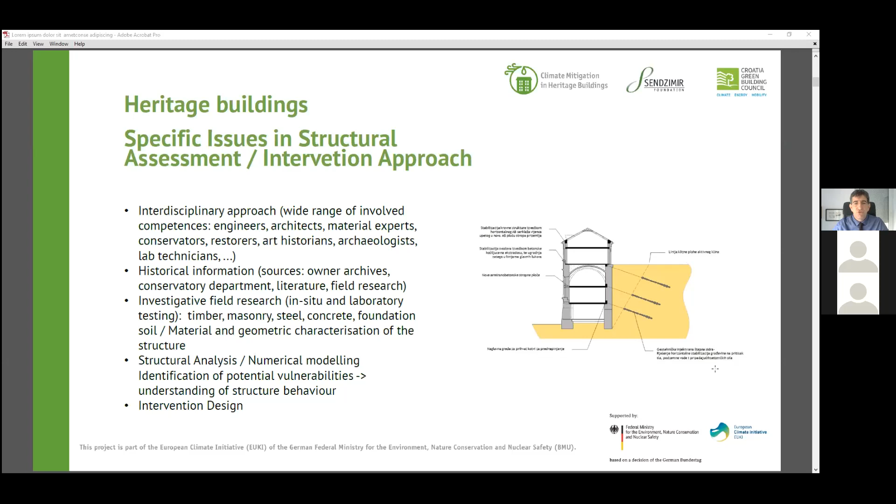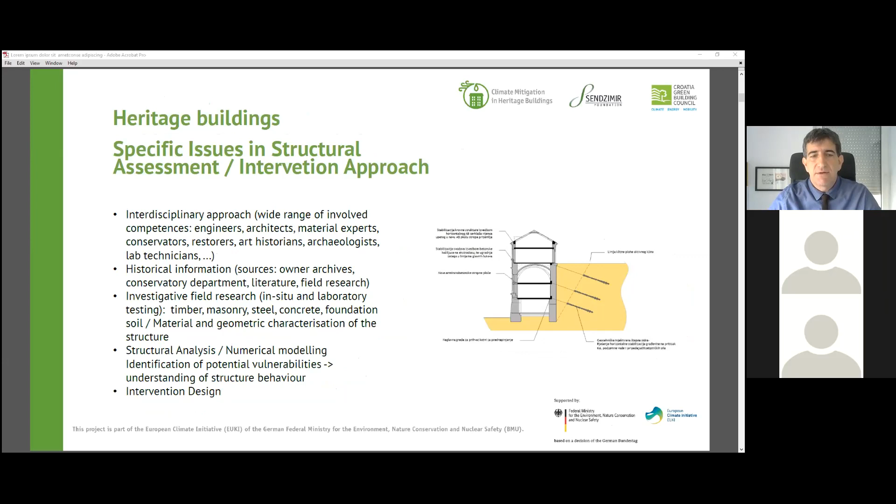Apart from this historical research, we have to do investigative field research of the materials in order to understand the structure, to see the damages, to see cracks, to see what is going on. And then we do structural analysis, some numerical modeling, to confirm our presumptions. So identification of potential vulnerabilities in order to understand the structure behavior. And then the last step is intervention design.

Therefore, I wanted to emphasize this. When it comes to heritage building structural interventions, a thorough assessment is everything. The retrofitting measures just follow. So again, this is very important for each structural engineer.

Today we have a huge variety of different computer programs which help us, but we shouldn't forget the field research. We shouldn't forget the investigative part. We shouldn't forget in situ testing, and all of these activities help us to understand the structure. And then, as stated here, the measures just follow.

So let us begin with this 19th century public building. The majority of presented buildings are in the Zagreb area. Some of them have been seriously damaged by the two earthquakes we had, and some of them were repaired before. This building consists of two parts. I hope you can see my pen. Okay, so this is the first part, and this is the second part of the building.

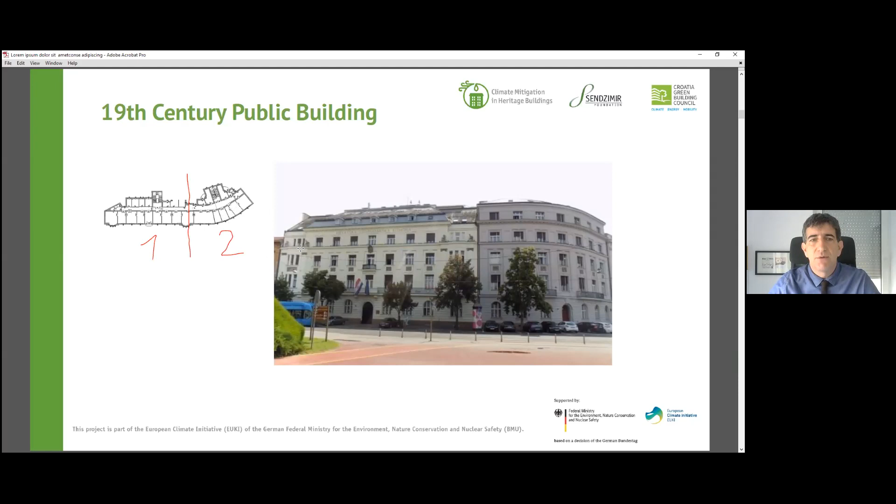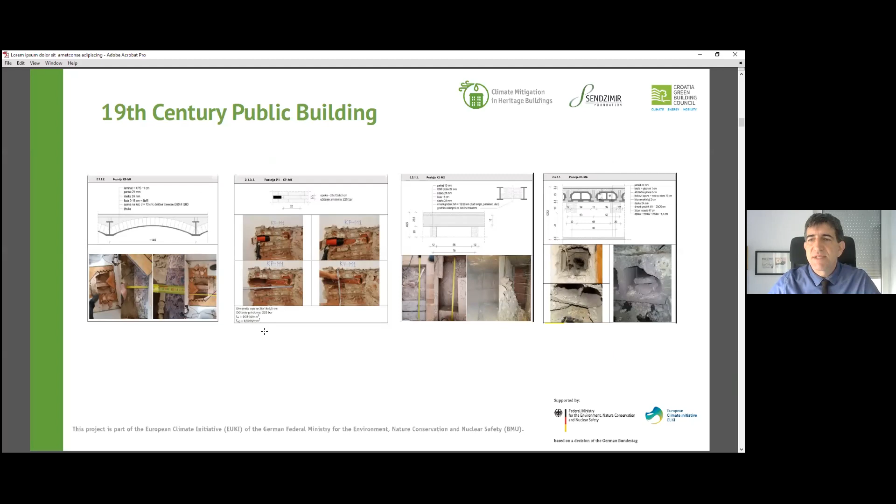The owner is the same, but we have to analyze it separately because in the joint here we have two separate walls. First, as I already said, the investigative part: these are some characteristic drills, sondages and testings in order to find out what is inside the walls, what is inside the floors. And this helps us to understand the structure and the behavior, so we can plan.

This is the characteristic floor plan. As you can see, again, I'm going to discuss only structural matters, but I hope it will be interesting for the other listeners, also architects or other listeners.

So the plan shows us the weakness of this building, and this is the lack of walls in transversal direction. So this is the direction which does not have enough seismic walls. All walls here you can see are only partition walls and do not work in the seismic loading. The longitudinal direction is good because we have 3 very strong lines of walls.

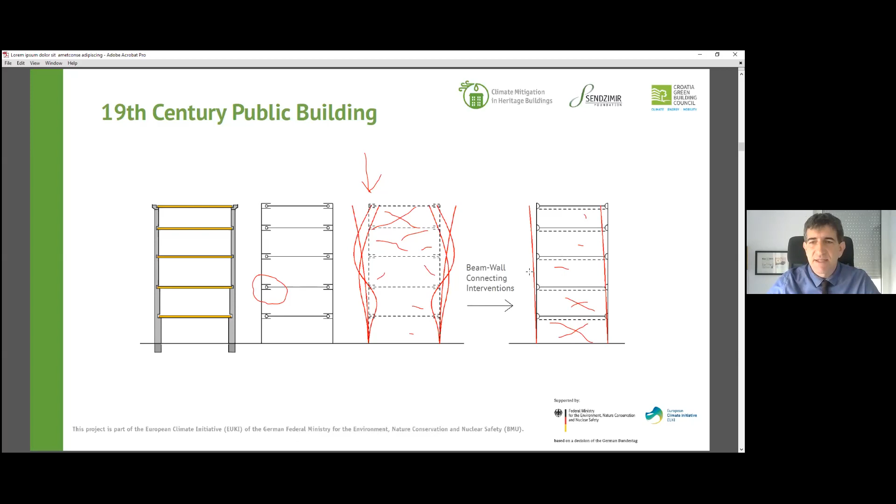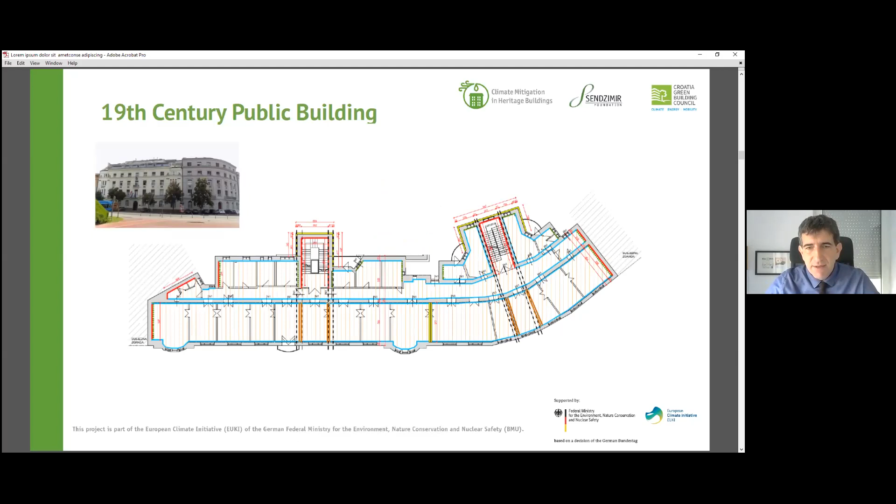So these are the measures we planned to do. These black lines present pre-stressed steel ropes, in order to attach the front of the house to the new strengthened cores in the back. So these are the pre-stressed steel tendons, and the blue lines present steel elements like angle profiles in order to achieve floor diaphragms, to stiffen the floor in its own plane.

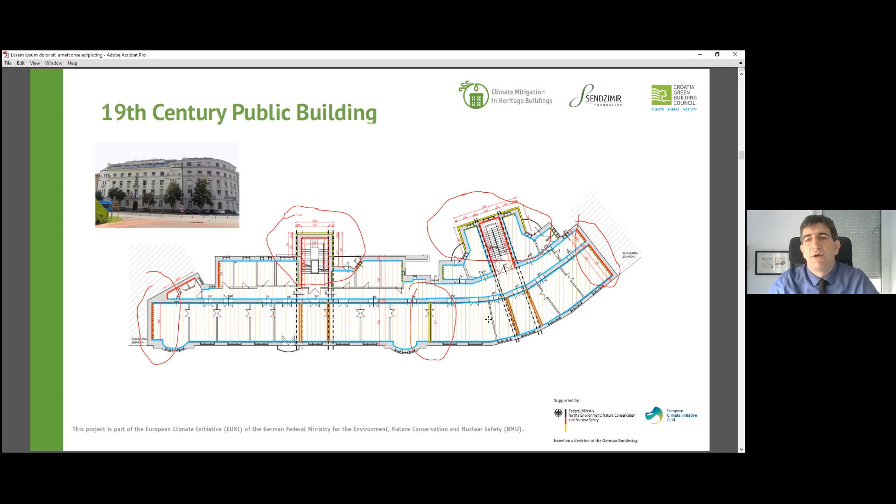The yellow lines are reinforced concrete, as I said, in the back, and also here at the joints, and here. So we have this symmetrical new disposition of elements, and therefore the building is much stronger.

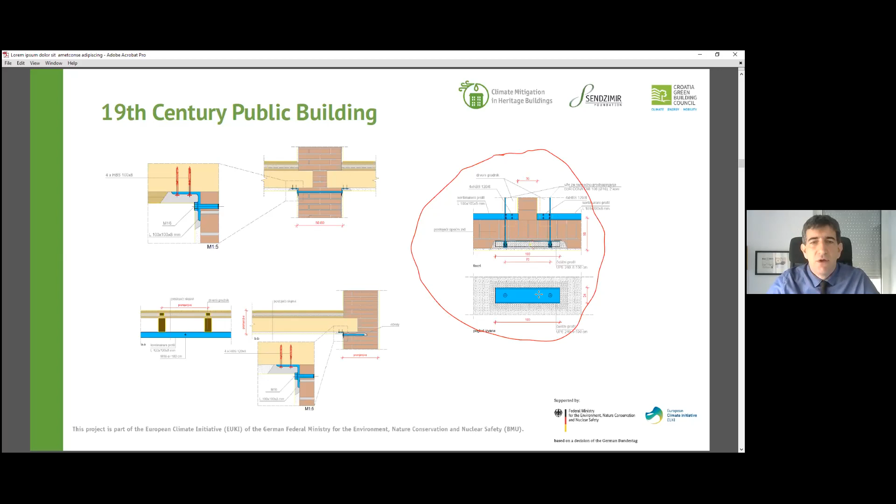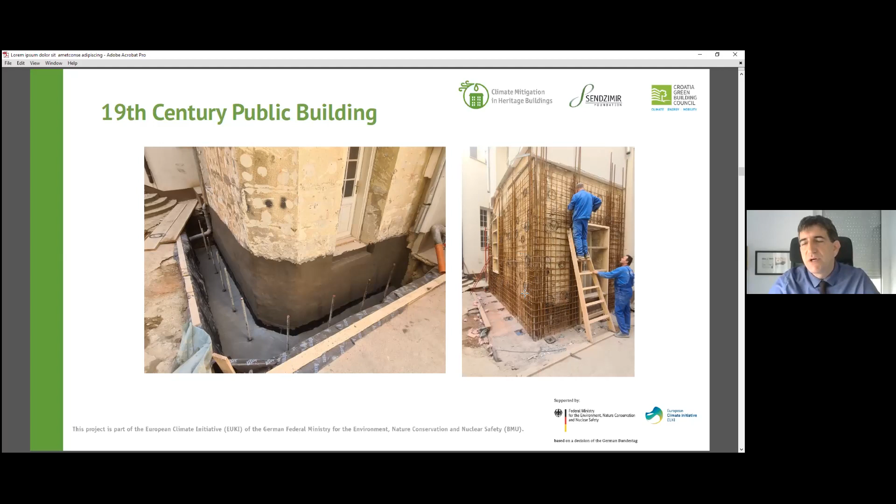Here are some photos from the construction site. These vertical steel rods are geotechnical anchors, 12 meters deep, in order to have tension forces at the bottom of the new core. And these are rebars for a new wall.

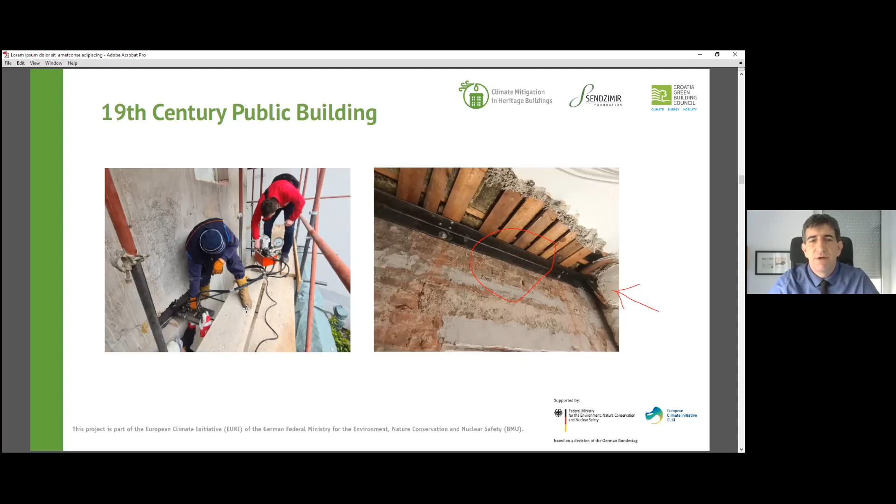Also here you can see this steel angle, which is under the ceiling, and this here is a partition wall, and the very important thing is for this steel angle to have continuity. So we had to break this partition wall in some small area just to have continuity of this steel angle. These two guys are pre-stressing steel ropes from the outside, and we achieved approximately 2.5 to 3 tons per steel rope.

Okay, the second object is the very famous Viewpoint tower in Zagreb, Park Maksimir. This is a masonry structure, early 20th century. We have original archive drawings.

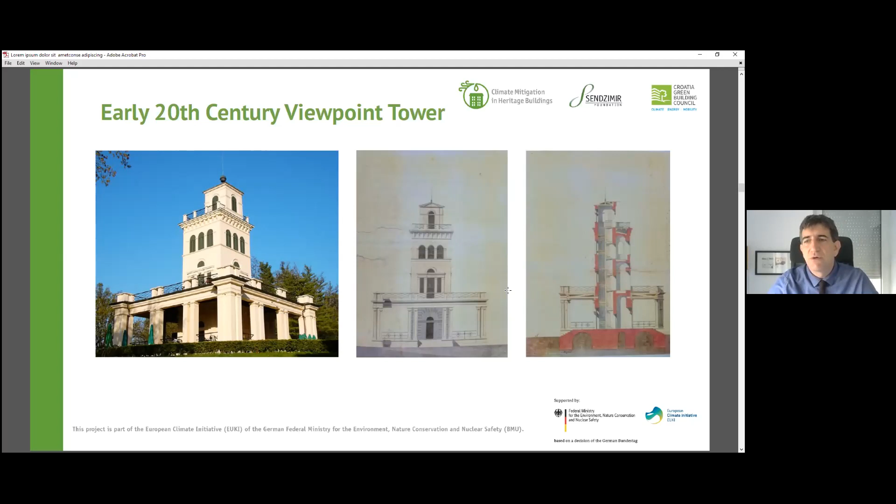As you can see, this is all bricks without concrete or without steel. Therefore, during this earthquake, it had a huge number of damages and cracks in this area here. So in this section here, the building is the weakest because it doesn't have enough walls to transfer the horizontal force.

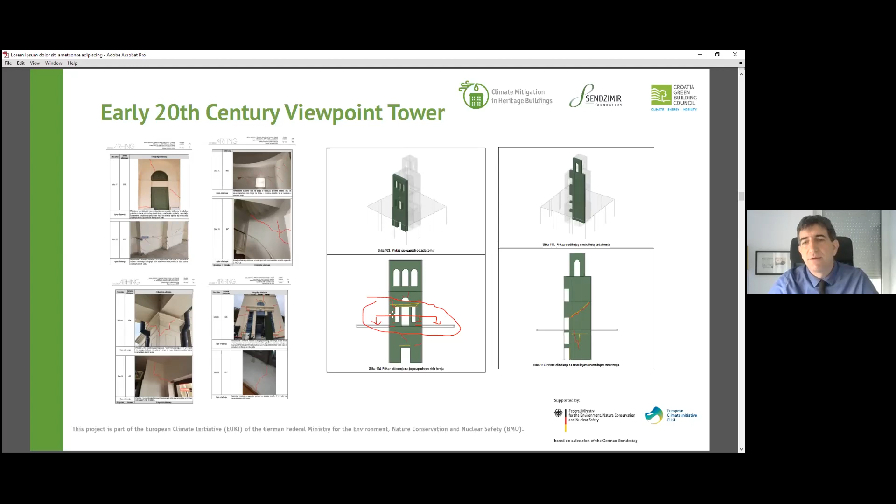Therefore, since we have this cape around it, we also have the stiffness issue here. So this is the basic damage mechanism we figured out. When we look at the majority of cracks, this is the most vulnerable area, and therefore with the measures we want to strengthen this part.

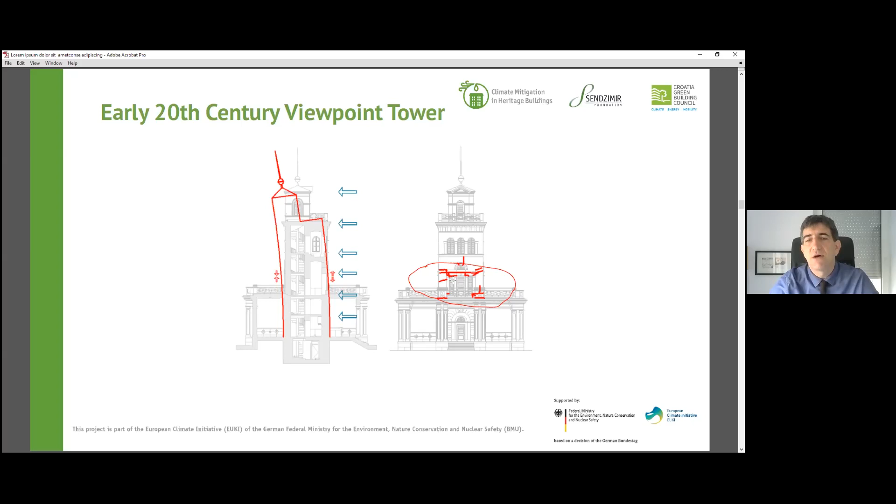Again, all the measures are going to be inside and not outside, so as not to ruin the appearance. So this is the steel, like a steel cage from the inside, which is modeled as a Vierendeel girder. It's like a truss, but without diagonals. Here we have chords. This angle profile is a chord, and these are horizontal elements. Again, we have steel ropes from the inside for the pre-stressing, and this is the anchorage detail from the outside. It will be covered in plaster afterwards.

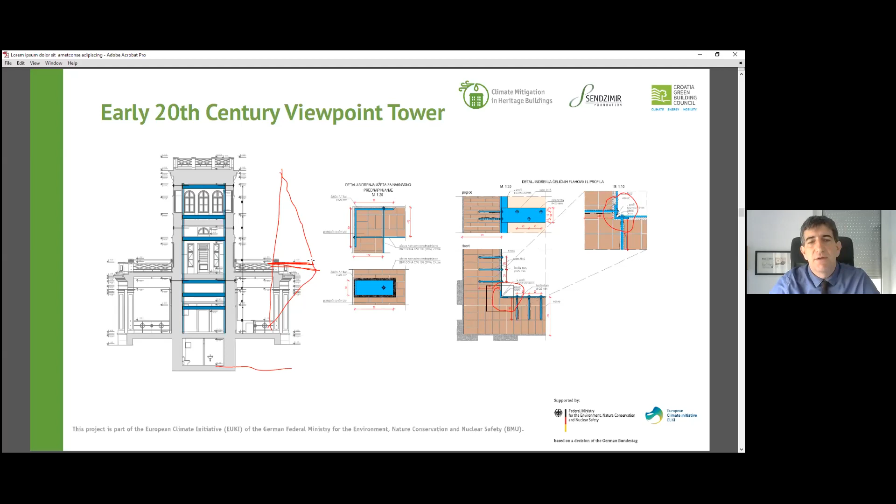So as you can see, we did not anchor this system to the foundation level. We just put it at the terrain level, because of the horizontal force and the moment it creates with this tower, this cantilever. So this is the section with the maximal horizontal forces. Okay, let's move on to the next.

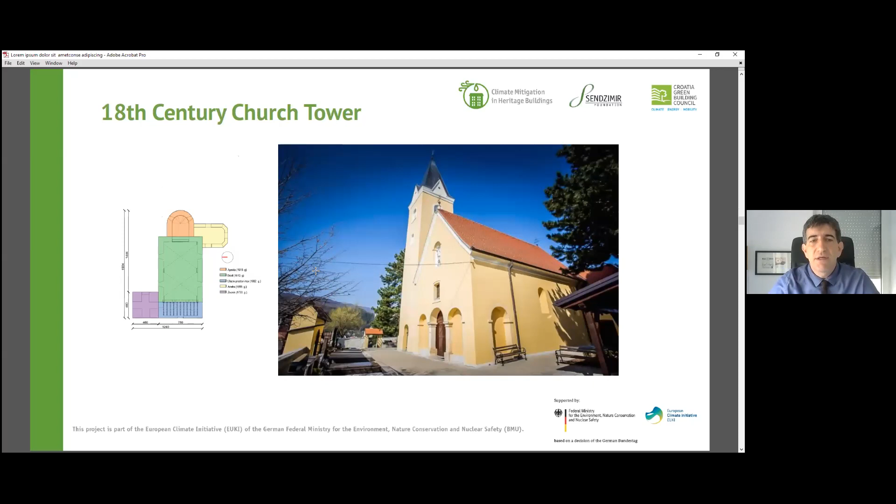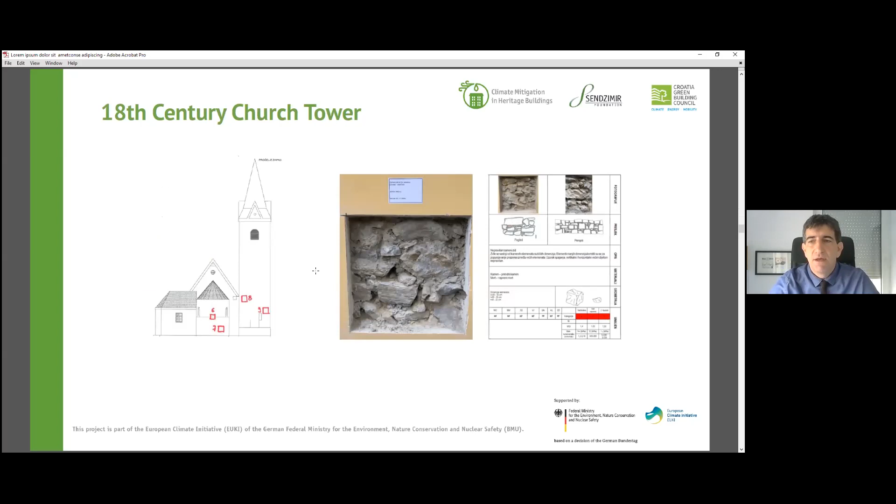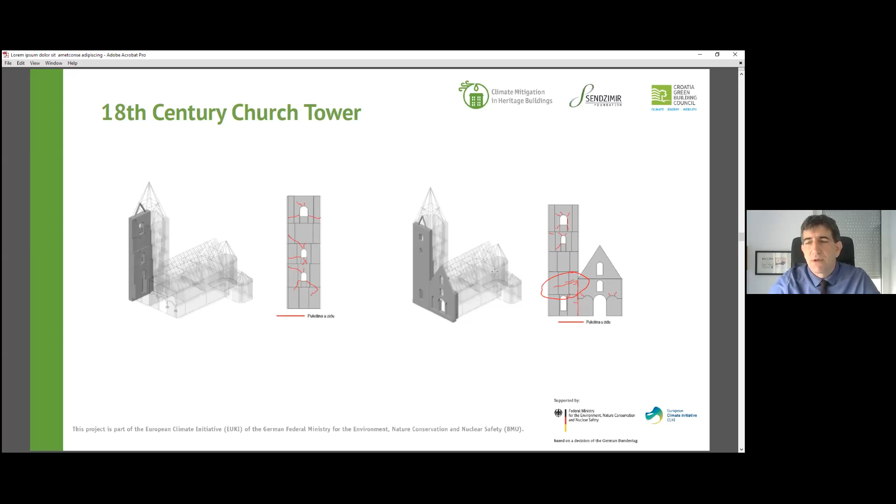It's a church tower, 18th century. This is a stone masonry building. These are investigative openings. These are the cracks we discovered. This crack here is the most important. We'll see it afterwards, and it is the most severe damage here. So we did the numerical modeling. This is the linear approach, and this is the nonlinear numerical modeling, which helps us to understand why this crack was formed.

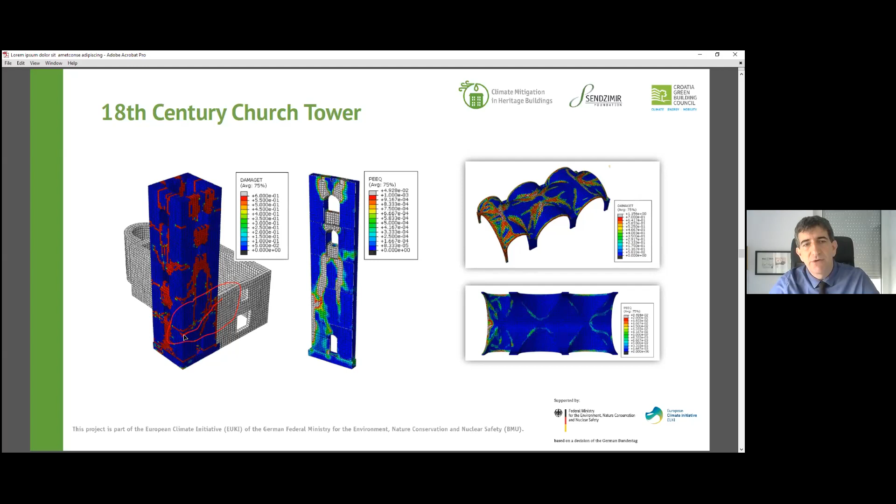So this is the one. It goes from the church like so to the other part of the tower. And this is the mechanism we discovered as the most effective one. So if the earthquake was any stronger or more lasting, the possible collapse would be like so, because we also have this kind of deformation of the tower. So there is an evident sliding plane that was created here, and this is what we have to prevent in the future.

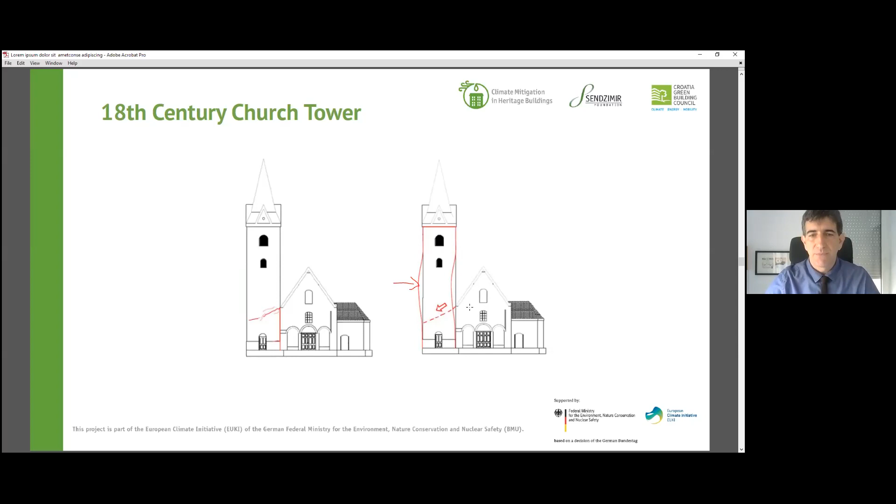Therefore, we plan to make this shear insert to transfer this horizontal shear force. And these are two solutions. Of course, inside of the tower we can do our measures, and the outside interventions are not likely to be accepted by conservators and architects, and so these are the two solutions we introduced to the conservation department and to the owner. So this steel truss was selected.

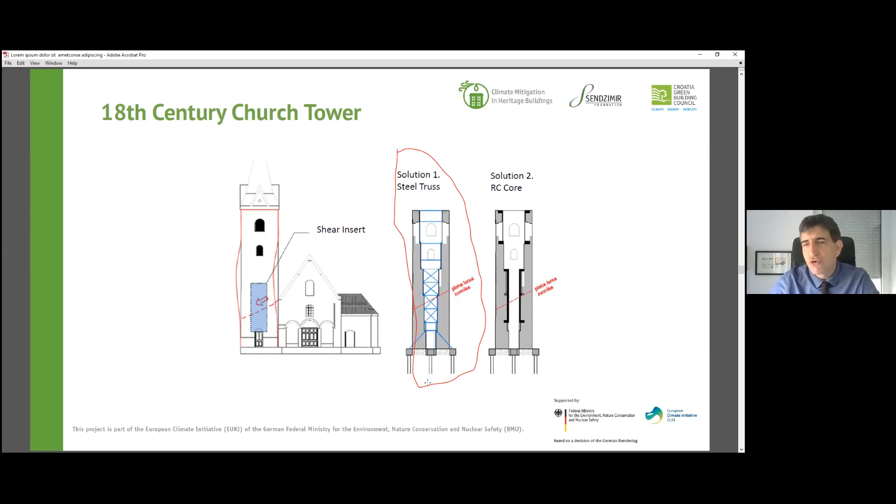Again, as the tower shown before, this is like a steel tube inside, but a real truss with diagonals. This is the reinforced concrete version, but this is a very invasive method, and therefore solution number one was shown and accepted. So these are drawings, the main and detailed design.

We attached the church to the tower because the church itself is very weak, and at this level the tower is very strong and powerful in terms of shear force transmission. So we put two rows of pre-stressed steel ties, and this here is the steel truss as a numerical model. So it works with the stone masonry. Also, this lower part of the stone masonry will be injected with some cementitious materials in order to improve the shear capacity of the tower.

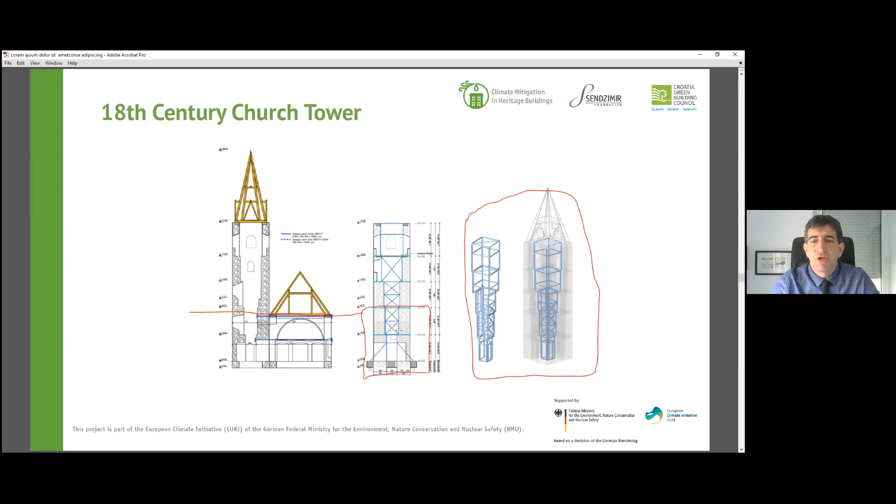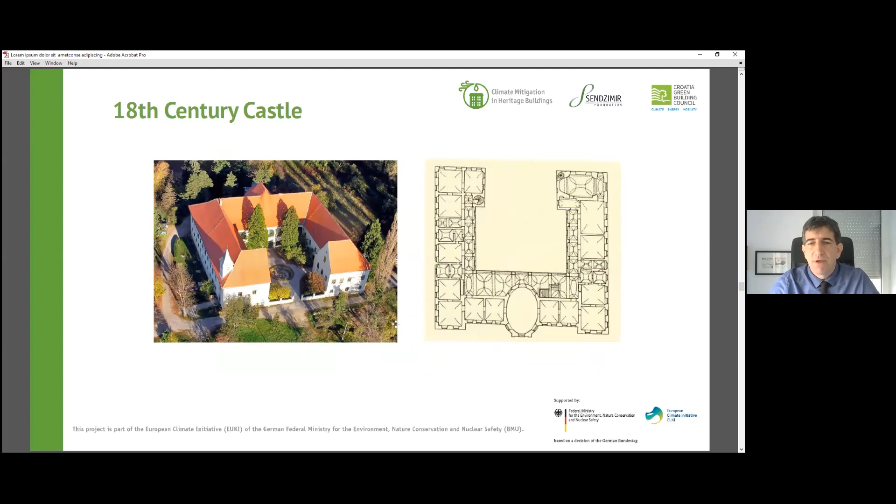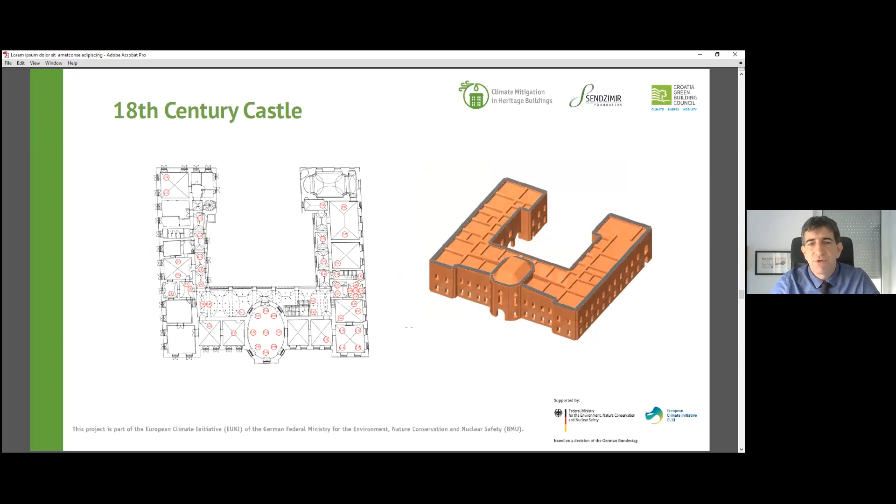Okay, let's go further. This is an 18th century castle. This is important. I wanted to show it because of the damage mechanism which occurred. And once you find out what this damage mechanism is, you can very easily intervene. So this is the plan, and this is the 3D calculation model. These red dots are damage which was evident after the earthquake. So this is just to illustrate the way we show these cracks, so you can easily track down possible local or global mechanisms which took place.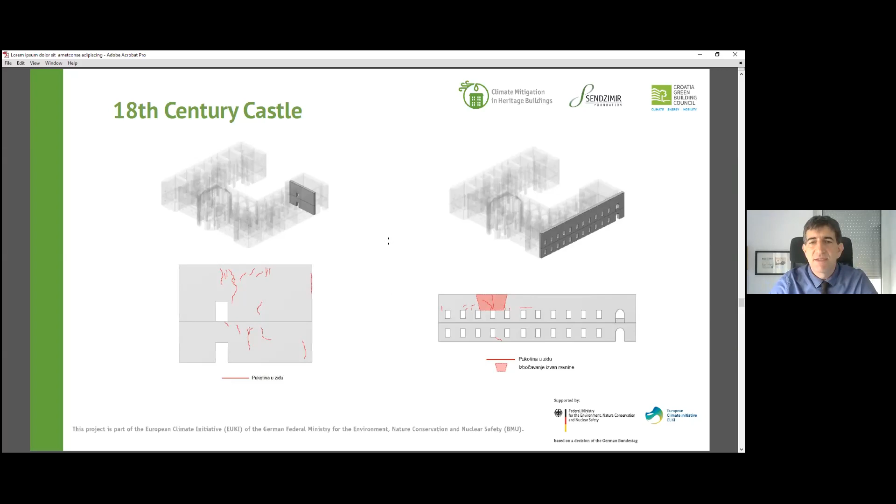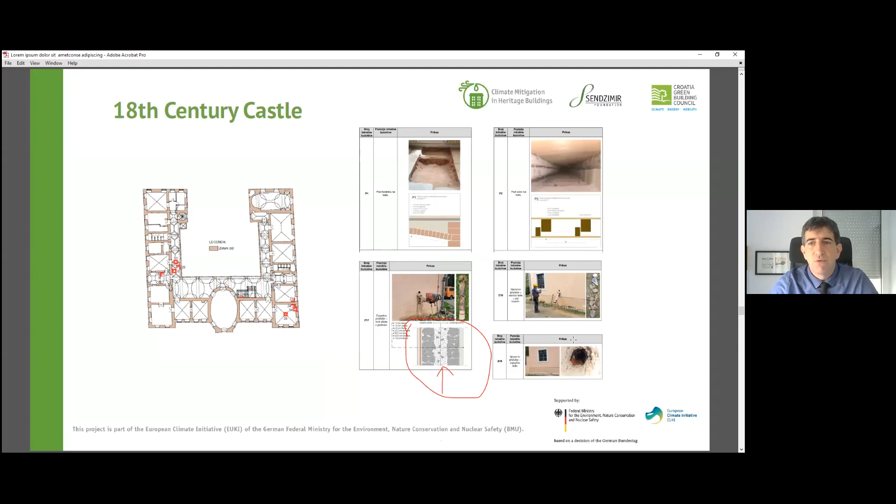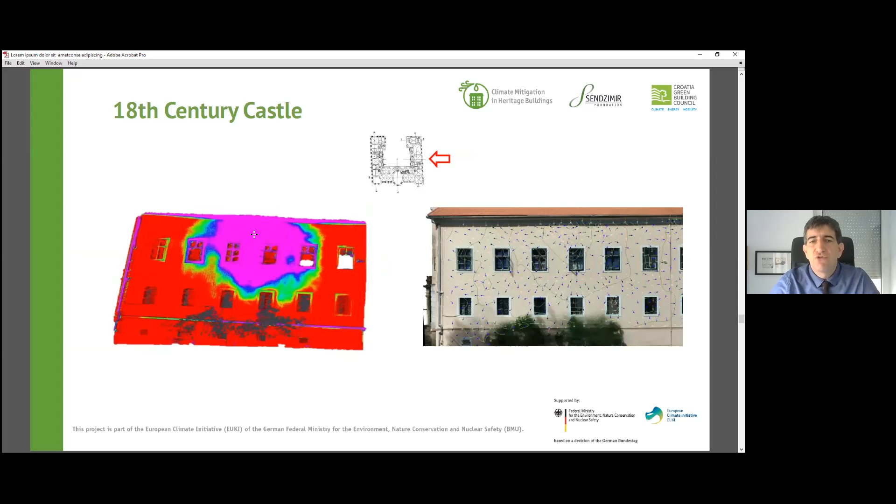These are again investigative works and drills. So this is one typical cross section of the wall. The lower parts of the castle are stone masonry with the infill here, like so, and stone elements at the face of the walls. Also, this is endoscopic investigation of the walls. This is the biggest deformation area of the perimeter walls we found. This is the 3D scanning of the deformation. So there is a huge out-of-plane displacement of this wall here.

And this is a sketch in order to understand what happened. So this last field of these masonry arches is pushing the walls outside, and therefore there was a crack within the transversal wall, which was here to prevent it, but after the cracking, the displacement was around 20 centimeters in the last couple of decades. These movements are very slow and long-term.

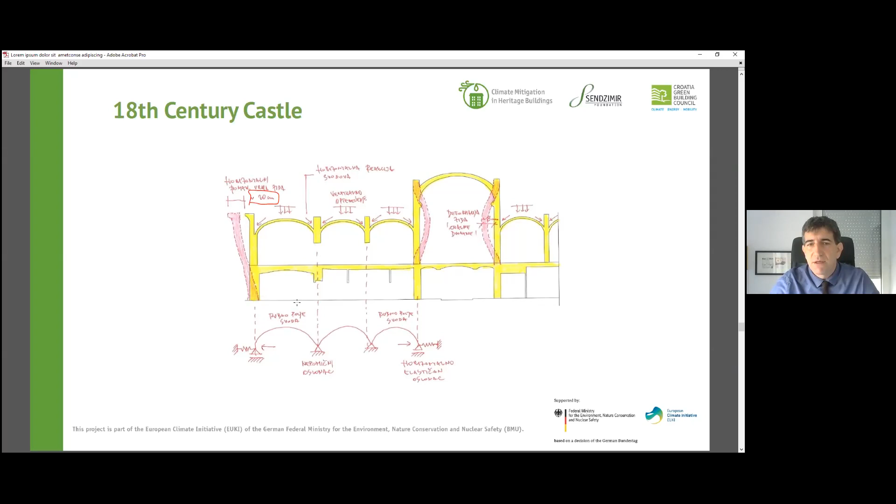So this historical part of the investigation is also very important. Sometimes it is very useful to talk to the people who live in or around the building, especially older people who have memories of events that are not archived or cannot be found in the archives or plans.

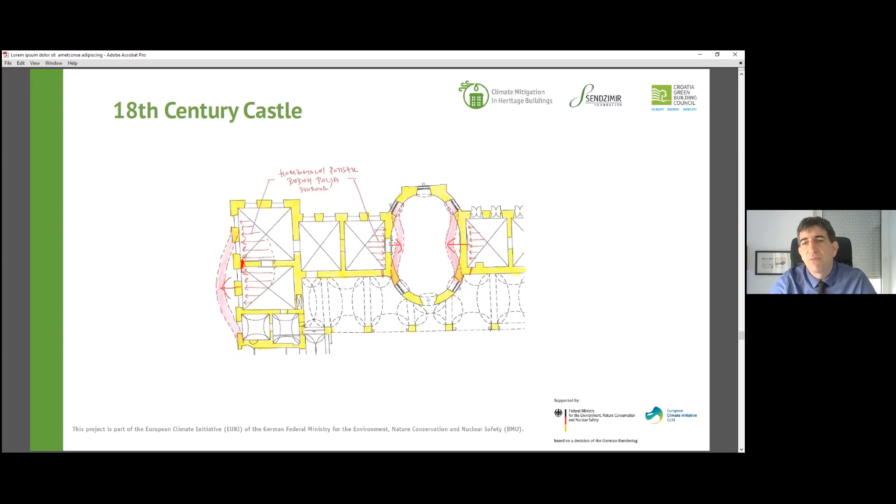Again, this is the same mechanism shown in the plan view. This wall here has serious cracks. Because this horizontal force is very strong, this wall came out. Also, this room here has a very large displacement of the walls, which are going again out of plane to the outside. And afterwards, it is very easy to plan the measures.

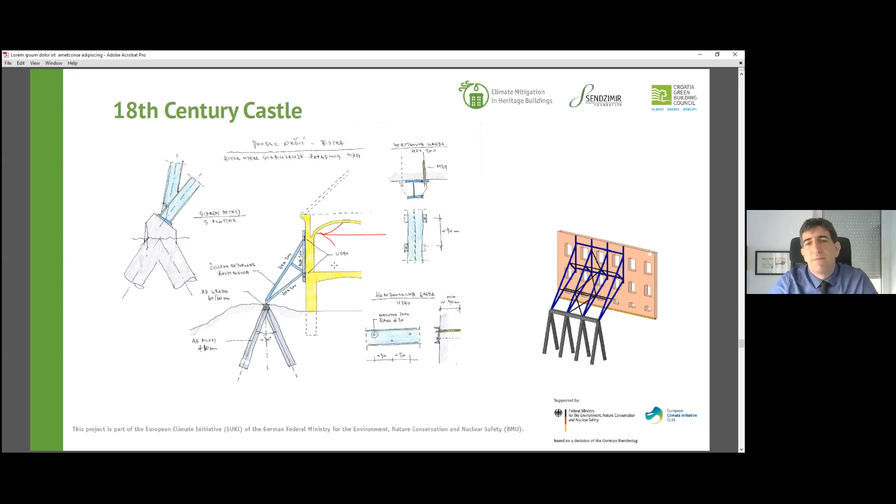This is the emergency measure. This is not a permanent solution, but because the castle is the hospital, none of the construction work can be provided from the inside. So we designed this kind of temporary support structure from the outside, in order to prevent this type of out-of-plane displacement. Again, this is the hole from the inside with the steel rods, which attach this wall to the longitudinal ones.

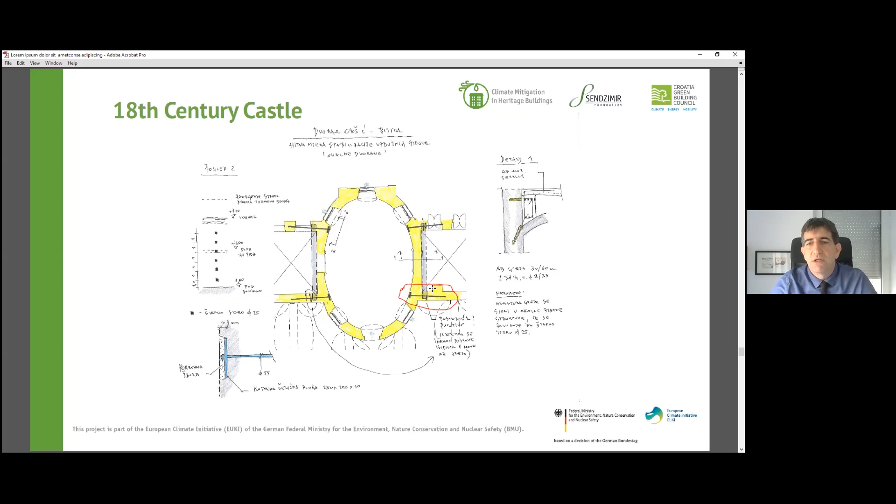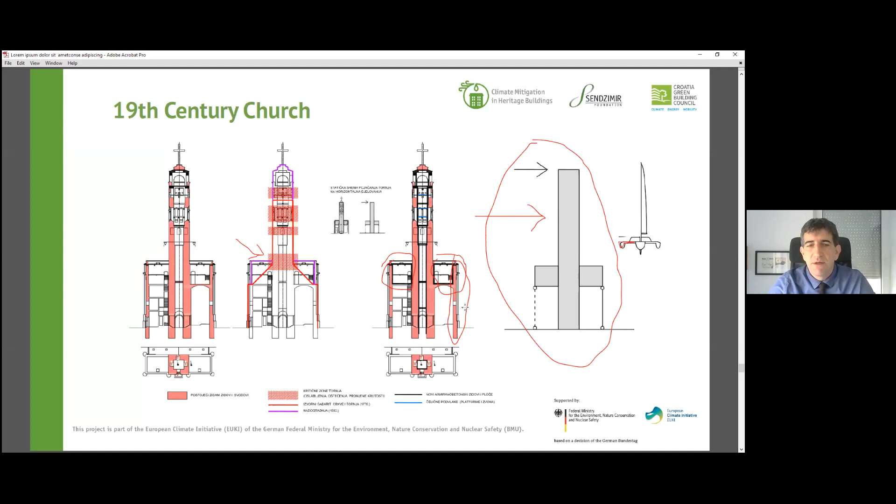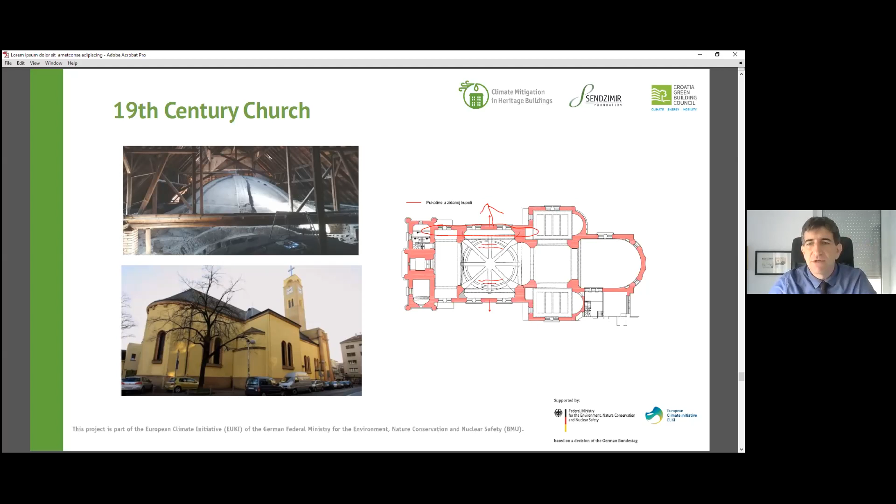Again, as I said, there are very serious cracks and deformations in the masonry dome inside. These red lines are cracks, showing us that these outside perimeter walls are going out. So the dome is losing its bearing points, and this is the damage mechanism and possibly the collapse mechanism which is going to occur for more serious earthquakes. This is the cross section: the out-of-plane deformation of longitudinal walls causing instability of the masonry dome.

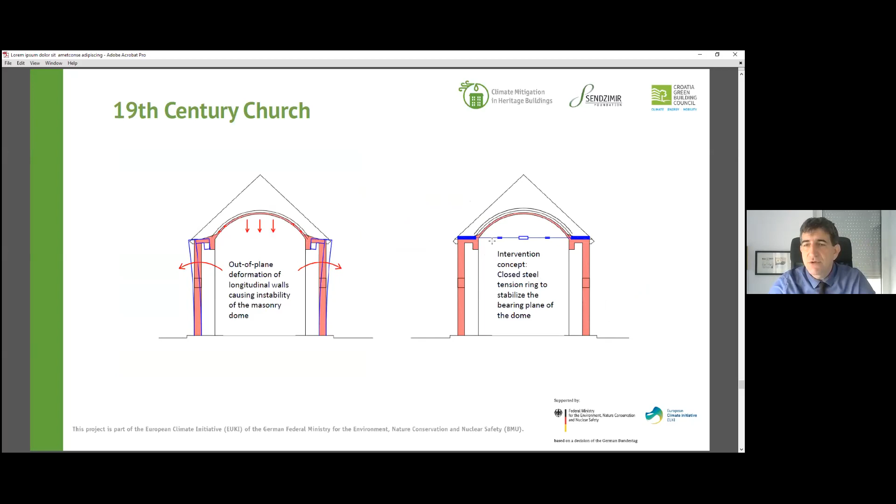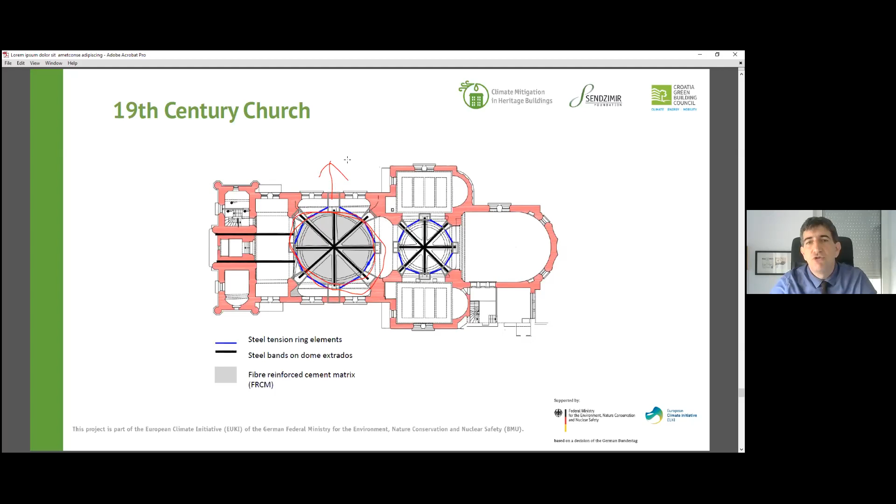So the intervention concept is to have a closed steel tension ring at the extrados of the dome, and none of it will be visible from the inside. These blue tension ring elements are at the extrados of the dome. Black steel lines are steel bands, again on the dome extrados. This is the way to embrace these horizontal forces and get them back to the dome and not push the outside walls. So these forces remain in this tension ring and do not go outside, causing out-of-plane deformation of the walls.

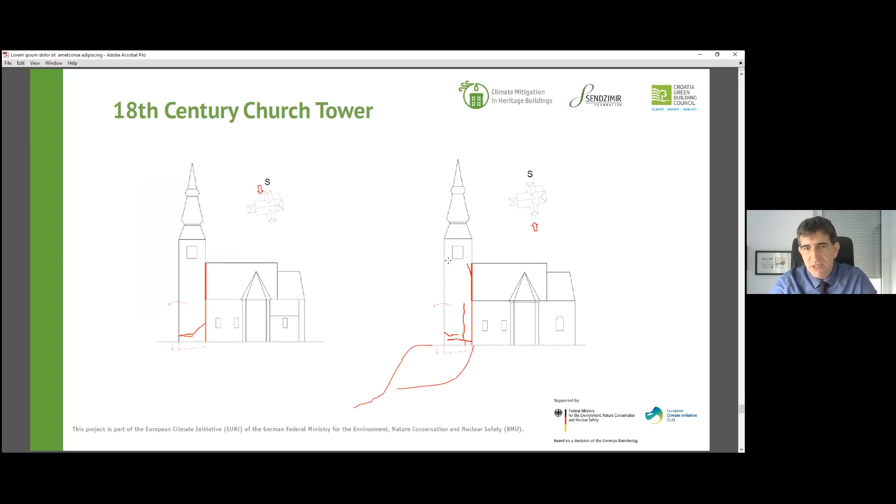Some different problematics, again with church towers. This is near the Petrinja area, an old church tower which has primarily issues with foundation soil instability. Here is a slope like so. This is the possible sliding mechanism of the soil. It is very important to investigate through geotechnical drillings, and therefore we can plan the improvement and strengthening of the soil.

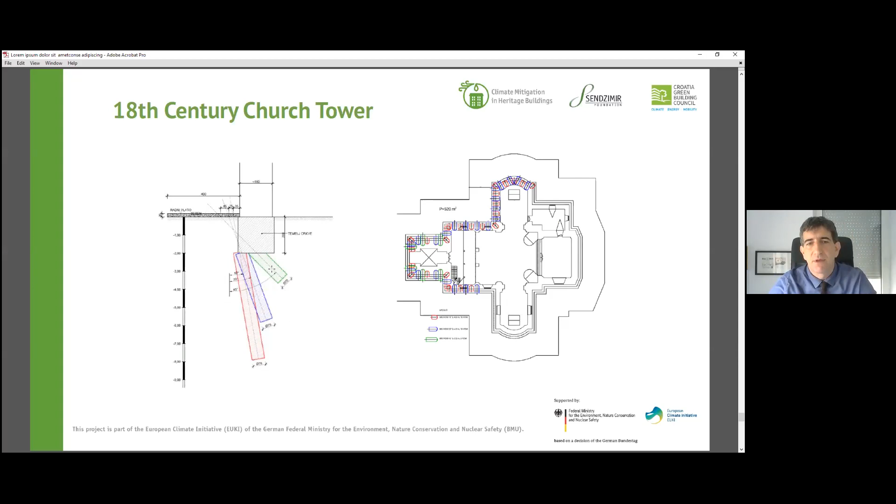I want to thank you for your attention, and close this lecture with a, for me, inspiring quote: "The quality of our work is precisely in the simplicity of the ideas that inspired it." Again, assessment when it comes to heritage buildings is everything, and once you assess it thoroughly, everything afterwards will be easy to plan.